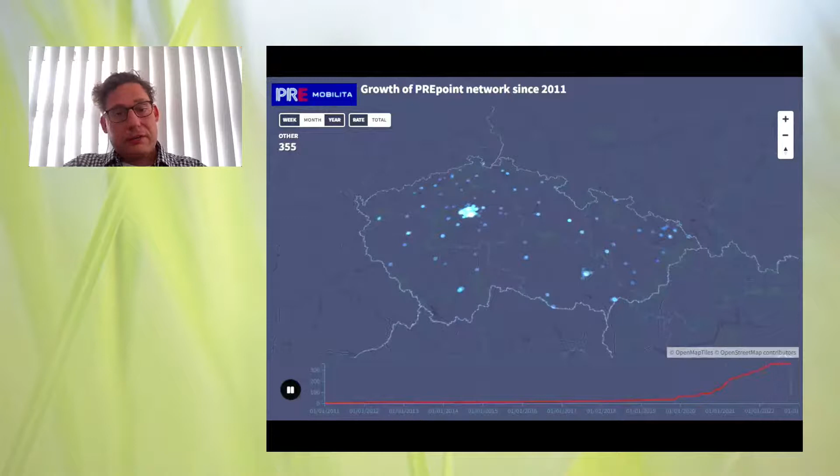From that, I wanted to show you how the project of public charging infrastructure went over time. Repeating one piece of information from the start, PRE is the second largest public charging operator here in the Czech Republic, meaning we operate around 400 public chargers. When you compare it to Western European countries, it's quite impossible to be in the top 3 with this size of network, but that's the current status of the network.

There is a plan behind it, and we are planning to grow the development plan. You can see on the chart on the slide that we are doubling the size of public charging infrastructure per year. So from that, we can see that starting in Prague, where most electric vehicles are operated, but by the time the network is growing, it's starting to become easy to drive through the Czech Republic.

What we can say openly is that the future is electric, therefore the charging map should be even more dense than it's now visible.

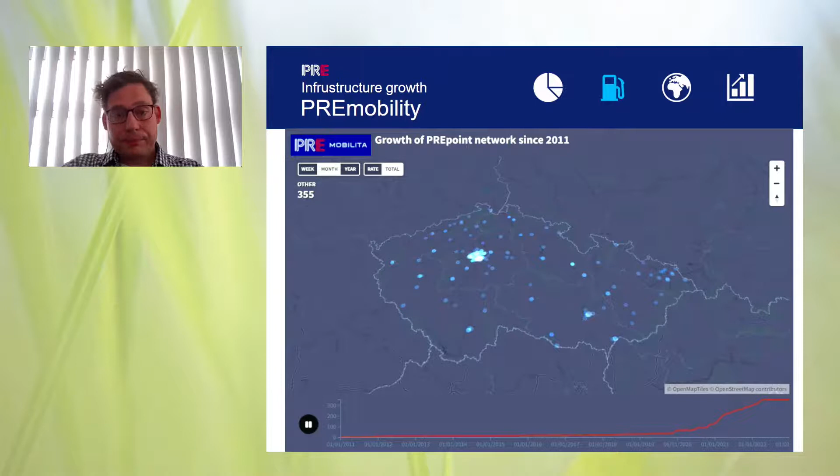Even in the year 2020, when there was a lockdown, we had quite a significant number. One third of our visitors on public charging infrastructure were from abroad, mainly Germany those days.

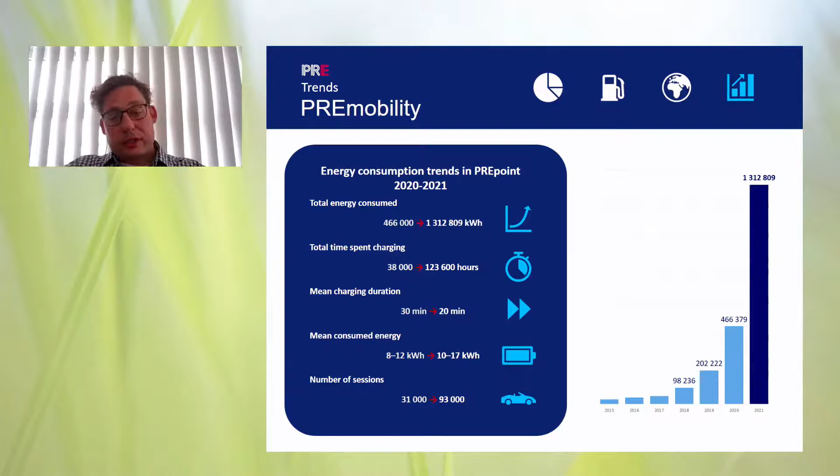So what are the key challenges we're going through in line with the strategic segments we are orienting or focusing on? Here in Prague, we are coping with the issue of having huge numbers of electric vehicles in one place, with the very same demand to be charged on time and drive wherever I like. That's why we really have to redesign the approach towards the grid and towards in-house buildings of charging infrastructure. That's really our key strategic initiative, to serve customers who have high numbers of cars in one building.

Plus, we have to accordingly shape the structure of public charging infrastructure in the city. For example, when you compare our initiatives focused on slow charging in the city, no one else on the market is doing so. It's a fact, we know it, but we are preparing the city of Prague to be ready for e-mobility.

We know that it's not normal to have a dedicated parking lot for your car once you're living in a city. That's why we're building such a huge AC, or slow charging, project in the region of Prague. What's the other challenge? As I was already mentioning, customers are used to spending less time on charging infrastructure, and they have larger batteries in their cars, so we have to prepare projects that really reflect this demand.

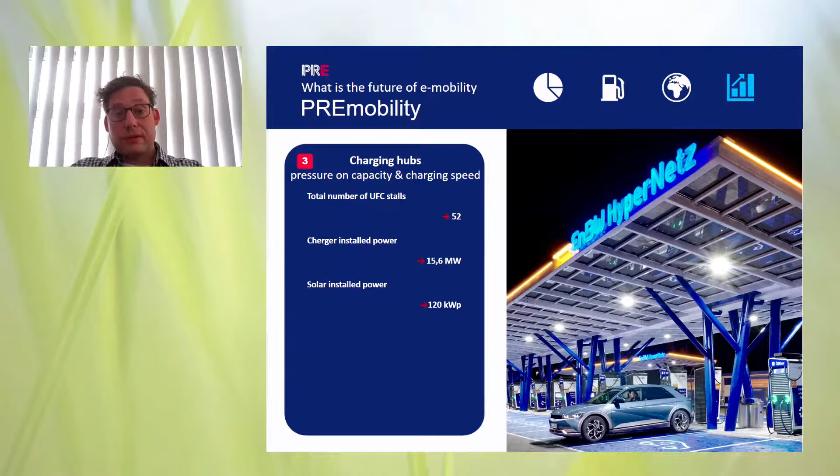And the last but not least, a special new topic for us as an infrastructure partner, especially regarding the issue of the Ukraine conflict: all the segments of e-mobility were accelerated, and there was one segment which was just in the field of visions and dreams, and it was heavy duty vehicles. But since like 3 months ago, it's starting to be reality.

What's the trouble in this case, or what's the challenge maybe? It's that the public charging infrastructure was designed long ago for standard family cars, and now we are having customers with a battery size like 3 personal cars, needing double the size of a parking lot. So that's the challenge which we are now trying to somehow solve and adjust our charging project for.

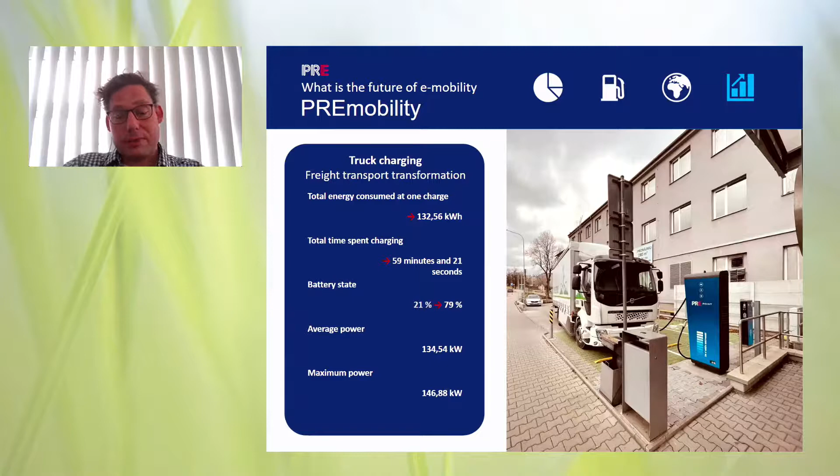And as the opener of this discussion, I think it's the general info what I wanted to share with you, and I'm happy to discuss the details and what are your experiences maybe from more developed markets than ours. So many thanks for your attention.

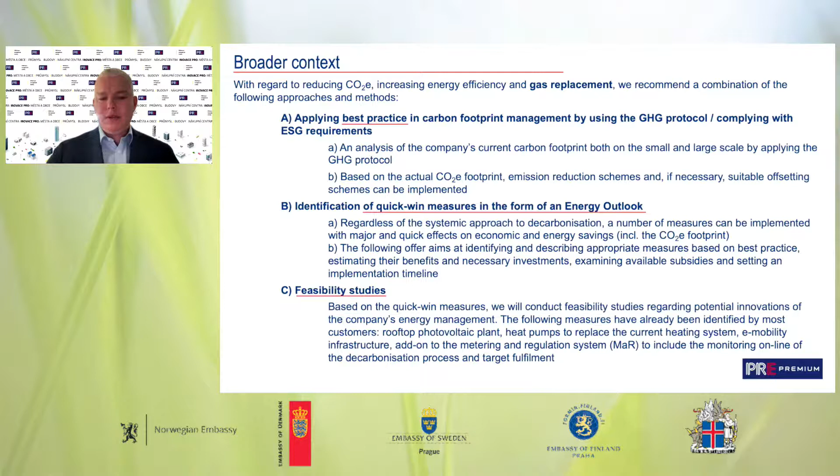After we've prepared this study, analysis and study of Energy Outlook, we usually continue with a feasibility study, where we go deeper into the technical aspects and prepare a regular technical solution proposal for how to go and get targets which are accepted from the Energy Outlook.

Reduction of CO2 footprint through innovation of energy infrastructure - gas replacement can increase your competitiveness, reduce or really exclude CO2 emissions to zero, and increase your energy efficiency. You can use these new technologies for a long period of time, so the technologies are already on the market. There are no technical questions or pilot projects needed. The technologies are here, and it's just necessary to choose the right one and implement them.

You can manage energy consumption online via the umbrella software. We call it Premium Digital. Via this software, you can easily meet ISO 50001 standards online. You can also, and we see this trend in the last period of time, produce your own energy via photovoltaic power plants. This is the most common way now of own energy production. And also you can additionally increase your EBITDA through energy efficiency.

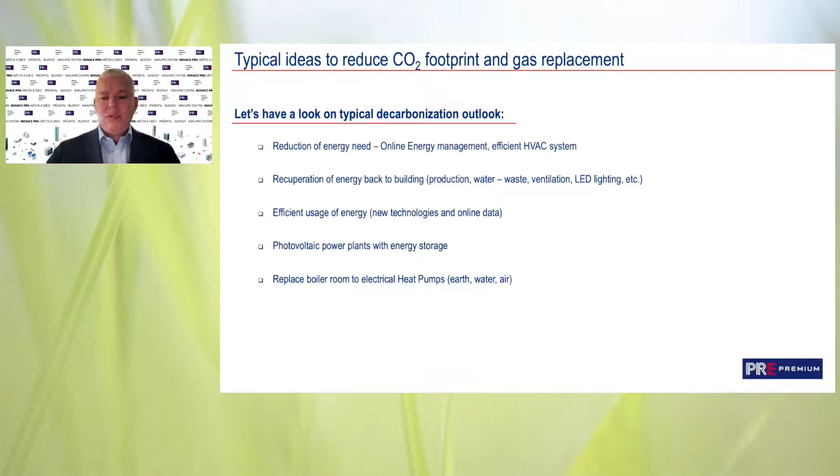This is the main topic now, connected with gas, to replace gas heat boilers with heat pumps, which are running on electricity, and also can be connected to the air systems. There are three possibilities how to use them. We can go in detail through questions in each project.

When there is an interest from the customer to make an analysis, we go through in the first step, as I said before, the Energy Outlook. The report is done usually up to 12 weeks. The price is in thousands of euros, not a high investment. We need a lot of information from the customer side, and we come with a description of the solution, budget, timeline, payback, and in some cases we try to find two different solutions, and the whole proposal is made via this Outlook.

Then we also look at financing, whether we go through our financing or financing with the bank, and also subsidies. So we are trying to find with the customer the best way to finance the project. And then we continue with a feasibility study or design work, and then comes the realization.

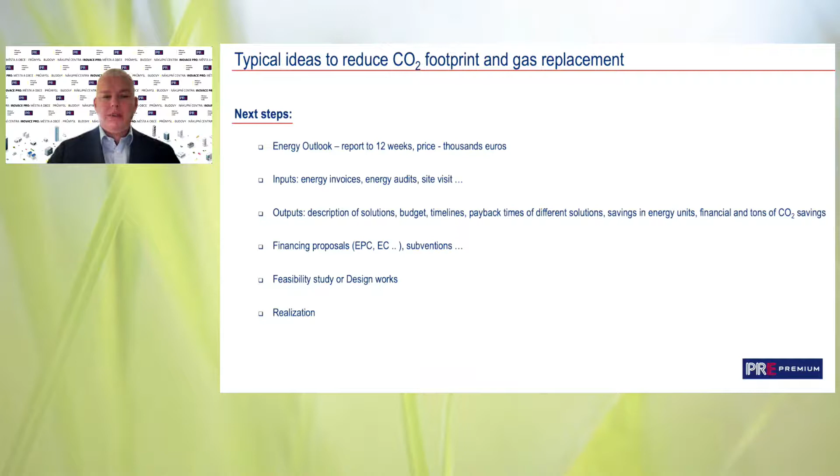Here is more detail about the Energy Outlook. You can see all the information we need to prepare the analysis. Mainly, we need an energy audit, project documentation of the actual state, a list of planned investments, and preferences from the customer side. Also, as much information as possible about electricity and gas consumption, including load profiles, especially in view of, let's say, 5 years production. And we discuss with the customer what his requirements are regarding compliance with ESG.

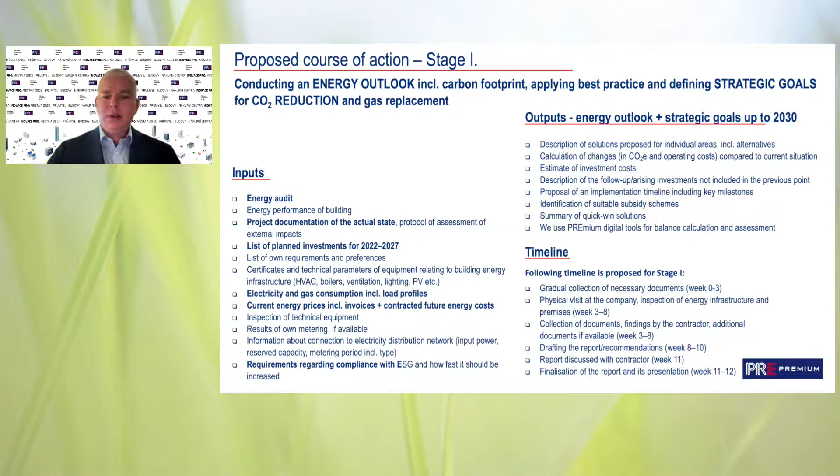Then we prepare through the Energy Outlook strategic goals in energy infrastructure, usually up to 2030, with a description of the solution in individual areas, including alternatives where possible. We calculate CO2, and as I said in previous slides, we estimate the investment cost and operating costs, and also the summary of quick win solutions through the GHG protocol. We use a Premium Digital tool not only for the analysis, but also for running the whole project up to 2030 and after that.

Here in detail is the timeline of how we go through each phase of the analysis. In general, we collect data, then it's necessary to make a physical visit from our technicians. Then we find the right solution, and we prepare the report for the customer. We discuss everything during the analysis, and we present the final report.

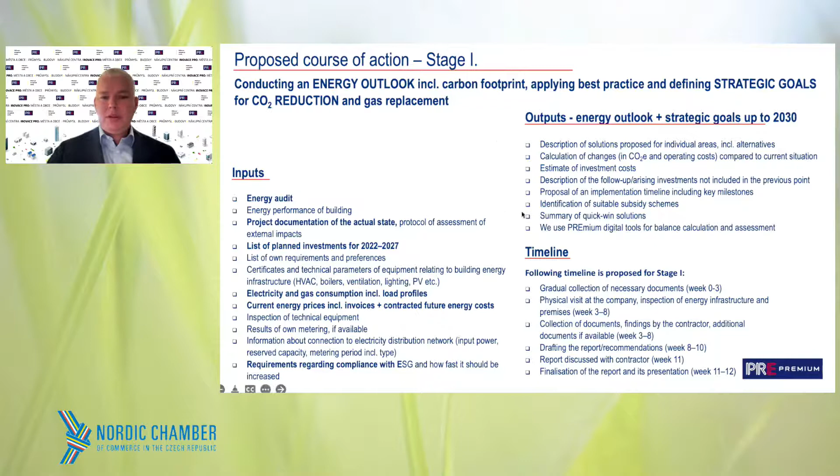Thank you, Mr. Stehlik. We have about the last 1 or 2 minutes because we are running out of time, so please take that into consideration.

Thank you very much, this is my last slide. After the Energy Outlook, we go to the feasibility study and drawing work, and here you can see details of how we go through the process. So thank you. And thank you again for the invitation, I'm here ready for any questions.

Great, thank you very much. Sorry for interrupting you, but I was afraid we were running out of time. We need to stick to our plan because we have a number of speakers here today.

I would like to ask you, how long does it take to build a photovoltaic power plant or replace gas boilers with heat pumps? Yes, with the power plant it is a little complicated because you need a construction permission, and before you get the construction permission, you need to make all the drawings and also a contract with the distribution network so the photovoltaic power plant will be connected once it's constructed. So this process needs at least 6 months.

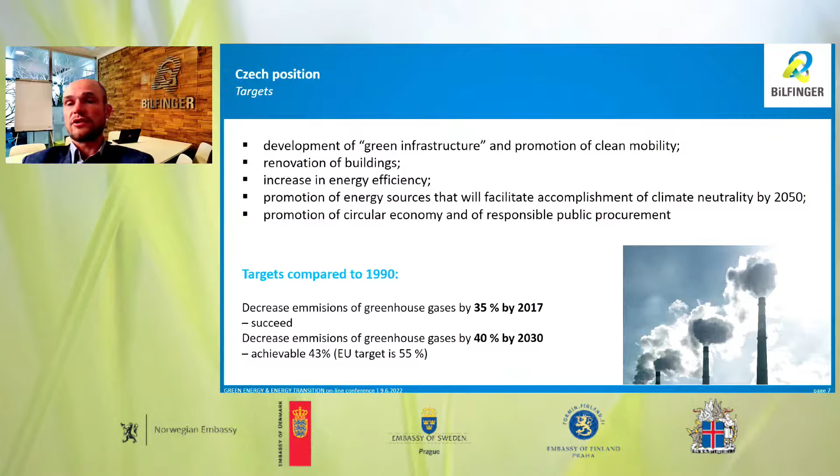There are several actions that the Czech government has in their strategy, which is actually to promote clean mobility and green infrastructure. Another big topic is renovation of buildings to make them more energy efficient, meaning residential, administrative, but also industrial buildings and industrial production sites, and to increase energy efficiency in the production processes. It's definitely a quite significant part of the puzzle.

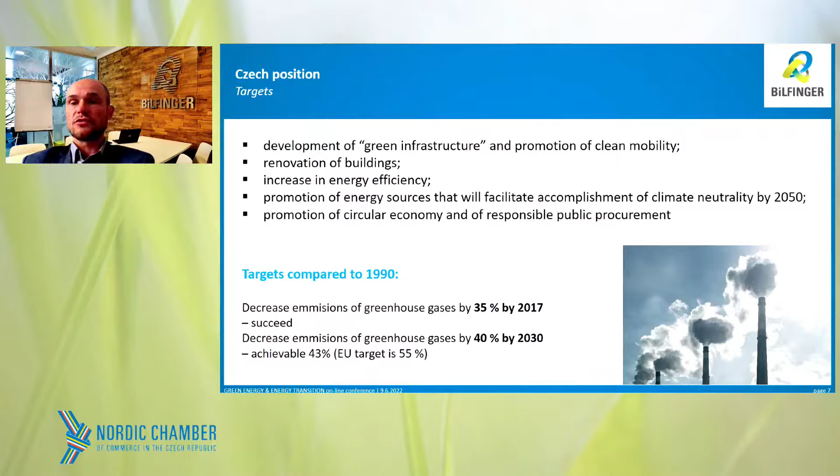And promotion of energy sources that will actually lead to climate neutrality by 2050, and also support the principle of circular economy and responsible public procurement.

From these you can see many trends that are on the market. Some of them are really closely connected with industry, some of them not, or only partly. What we see now on the market is that all operators of power and heating plants are now doing and preparing the greening of these power and heating plants, especially coal plants or plants that use coal or other fossil fuels for combustion.

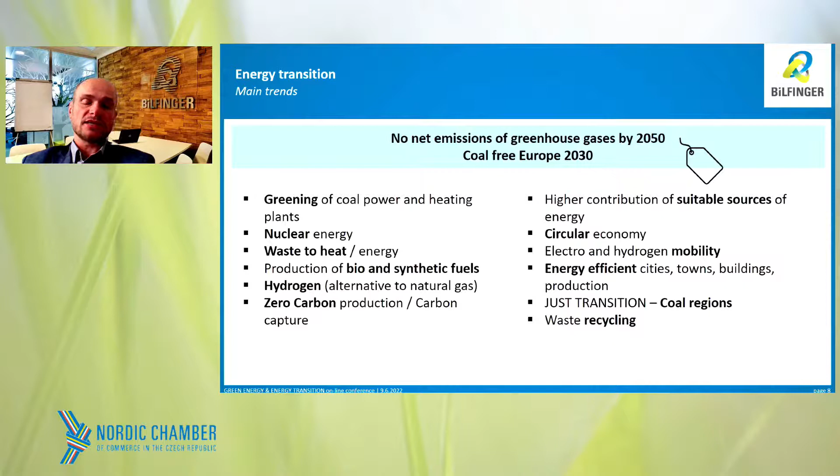We also see that one of the ways to reduce greenhouse gas emissions is nuclear energy. You maybe know that there were quite a lot of discussions about nuclear energy in the European Commission, also in the taxonomy and so on. Fortunately for the Czech Republic, nuclear energy is playing a significant role, especially for some countries including the Czech Republic, and thanks to France, which is also focusing on nuclear industry and planning new power plants.

Also Poland is planning new power plants, and you know that now we have opened the tender for Dukovany. So this is also quite an important game changer, and if everything goes well, by 2035 to 2038 we will have the energy from the fifth block of Dukovany.

A quite big topic is becoming waste to energy or waste to heat. It's definitely one way to deal with waste. Another trend is waste recycling and circular economy. But some of the waste is not possible to recycle, and there is the option to use the energetic value of the waste. There are a couple of projects planned on the Czech market for waste to energy, waste to heat. Unfortunately, not all of them are proceeding as we would expect, but definitely for the future this is the trend.

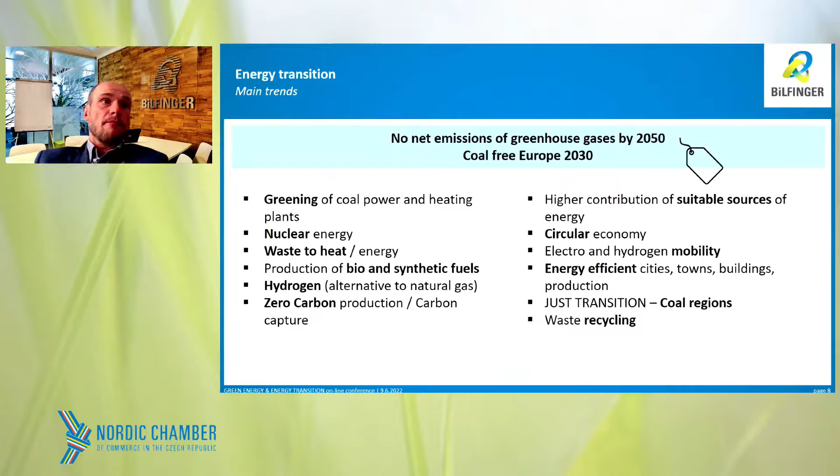Let's move to another slide, because I'll show you a couple of examples of investment projects that we see on the market.

On the other hand, there are industrial policies promoting the greening of industry, with short and long term goals.

There are several areas where definitely there will be investments, where companies and the public sector will invest.

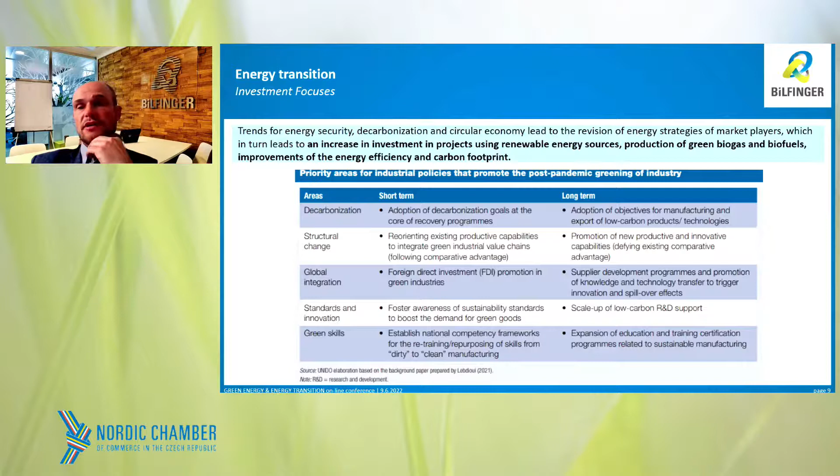Decarbonization itself - I've mentioned several examples, and I will touch on this topic later in detail.

Structural changes are also about orienting existing production capabilities to integrate green solutions and into the green value chain.

For global integration, it's about foreign direct investment and development programs to promote new technologies and technology transfers.

This supports R&D activities and other spillover effects.

A quite big topic is also standardization and innovation. Right now we are in a period where new standards are being created.

This applies to the entire value chain of production, to produce goods in a greener way, and also to promote the fact that these goods are greener.

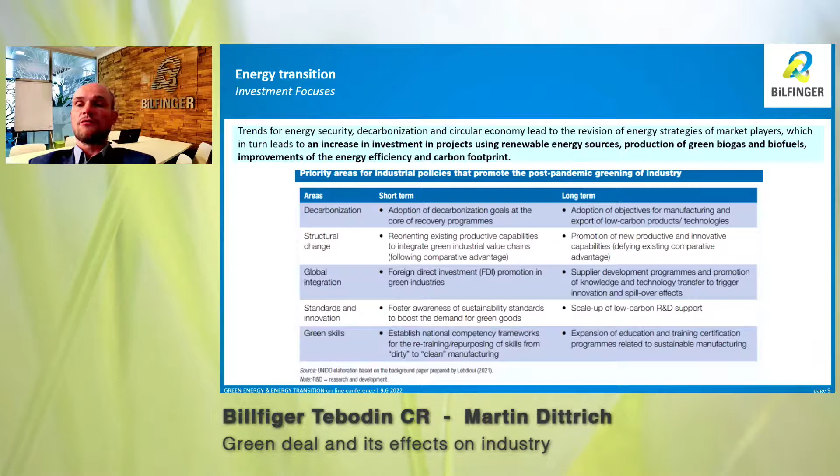That means training and certification for both the manufacturing and public sectors.

Okay, so these are actually the actions and topics that you can find in the Green Deal.

And then came February 2022.

The war in Ukraine started, and the EU responded to the situation and the energy issues we began facing with REPowerEU.

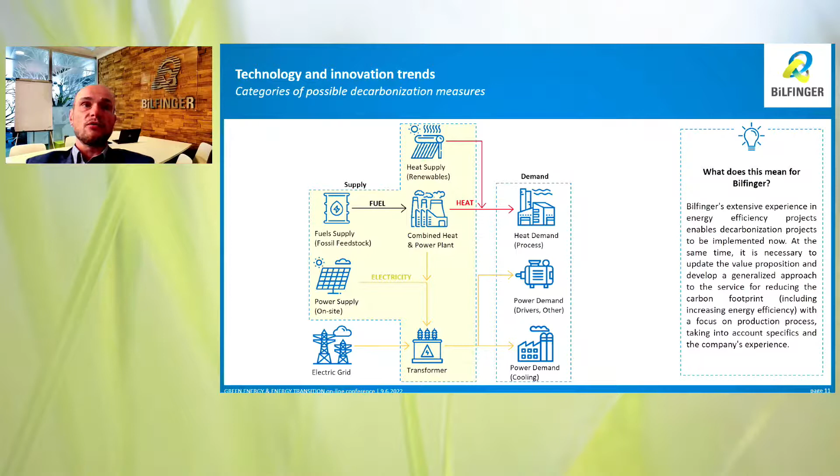They will also be required by the supply chain to prove their greenhouse gas footprint.

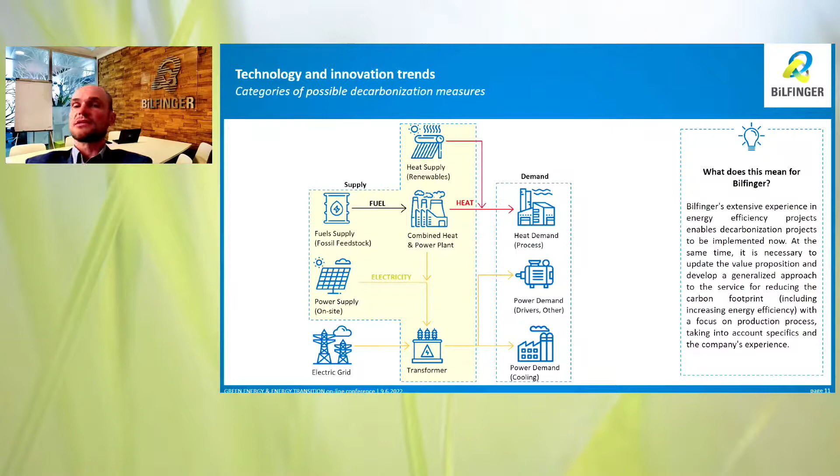There are several methodologies for calculating the greenhouse gas footprint. One of them is the Greenhouse Gas Protocol, where you assess the company in three stages.

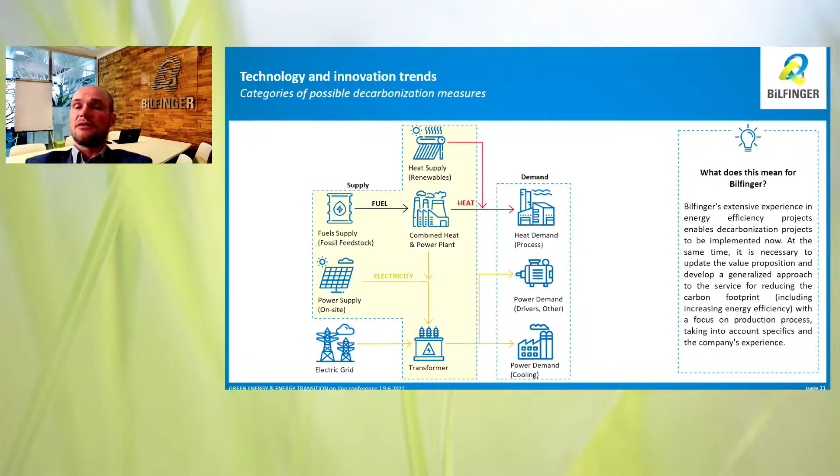What you see on this slide or picture is actually stage 1 and stage 2.

Stage 1 means all the greenhouse gas emissions that the production company produces during the production process, directly connected to its activities.

Stage 2 is the electricity that the investor is buying from the market, for which he also needs to calculate the greenhouse gas footprint of this energy.

There are several ways to reduce this greenhouse gas or carbon footprint. We can look at sources of heat, sources of electricity, and install new renewable energy sources.

This includes using solar, wind energy, energy from green hydrogen, and so on.

But there is also a big part of the story on the demand side, where we can optimize many processes in production, especially connected to heat demand in the production process.

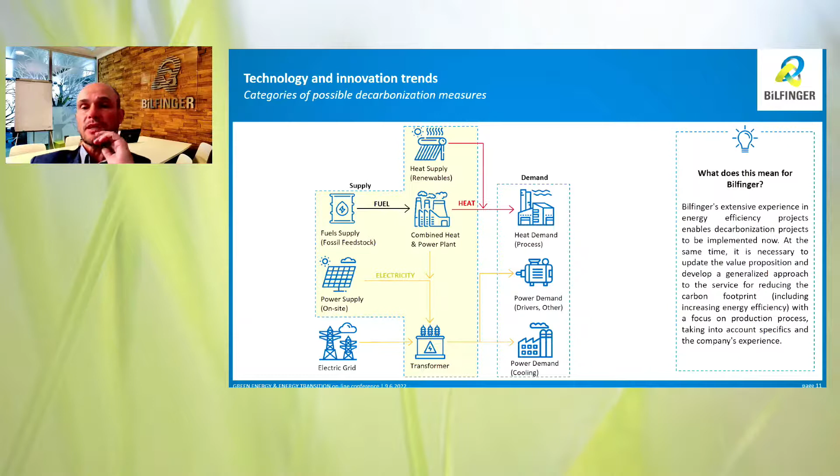It also involves using, for example, waste heat or waste cooling systems, to optimize and make the processes much more efficient.

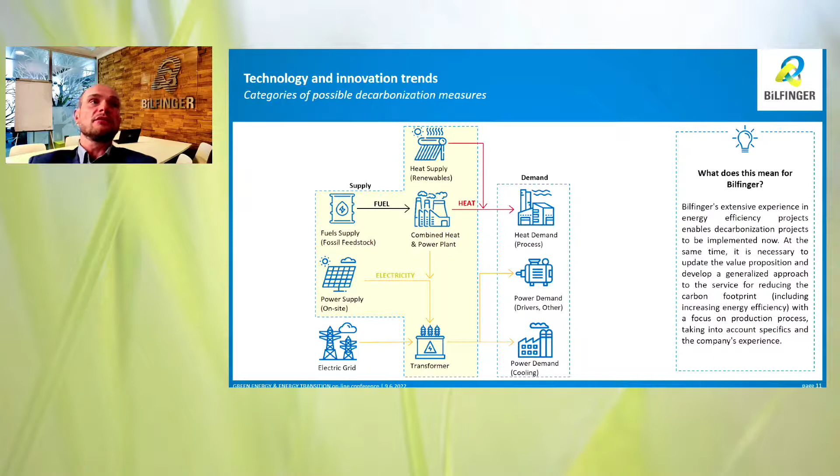Bilfinger is now building a portfolio of services for how we can help clients target these aims.

There are several fields where we can help industrial clients meet these targets and prepare the road towards carbon neutrality.

Most of these things I've already mentioned, but I would point out CO2 master planning, where we can really help clients analyze all of these processes.

We help clients create a road towards carbon neutrality.

We are also really focusing on new technologies and solutions like carbon capture, utilization, and storage technologies - I think this is one of the biggest trends for the future.

It's hydrogen - both green, but we still have other colors of hydrogen as well.

We can help the client across the entire value chain of hydrogen - not only production, but also transportation and utilization of hydrogen.

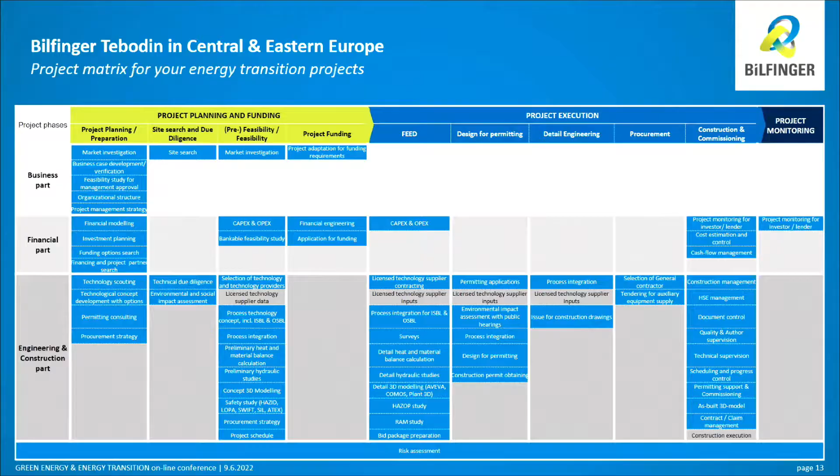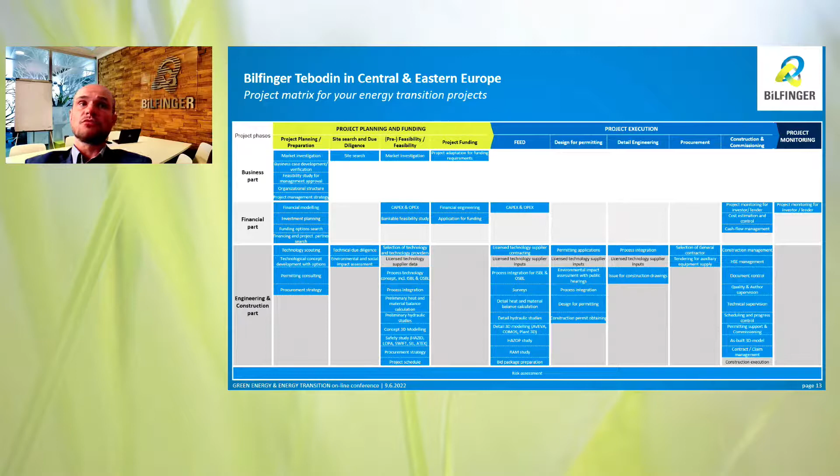Actually, I'm going to my last slide, where I would like to show you how we can help make these energy projects happen. As I mentioned, Bilfinger Tebodin is an engineering and consultancy company. Typically we are an EPCM contractor, meaning we help our clients through all phases of engineering, procurement, finding the right contractors, suppliers, licensors, and during execution we help manage the construction site, cost control, health and safety coordination, and these types of services.

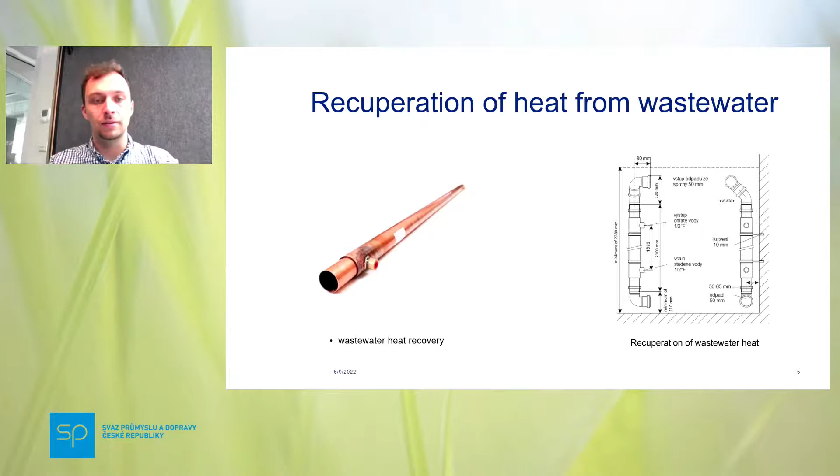In our residential projects, we also use a gray water system that saves potable water because it reuses the water twice in the building. That means the water used in sinks and showers is cleaned and can also be used to flush toilets. This also renews the energy before putting it out of the building. But that's a different subject for presentation.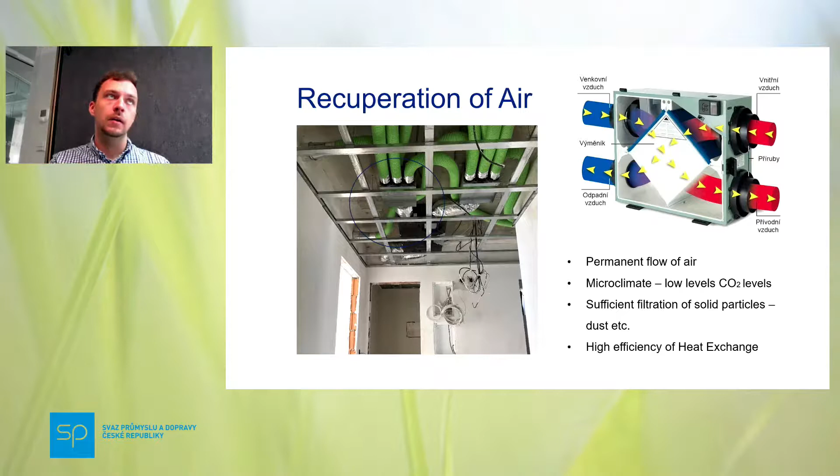That means you have lower CO2 levels and don't have to open the windows as often. Also, the efficiency of heat exchange is very high. So these are the solutions that basically renew energy and are very efficient in exchanging energy within your building.

But how can you produce energy inside the building without relying on an outside system, meaning burning gas or anything non-renewable? Basically, solar panels that can preheat water for heating the inner rooms and all the flats. So what is the system basically? The logic is that cold water is pumped up to the roof, where it circulates through the solar panels and is preheated to, let's say, 40 to 50 degrees Celsius. Then it's brought back down to where the gas burner is and heated to the temperature that's needed by the consumer.

From the energy certificate we created for this project in 2021, it was put into the occupancy permit. It's called Čertův vršek, and the installation of this energy efficiency system covers a third of the whole energy demand of the building. So that's a significant piece that can help throughout the whole project.

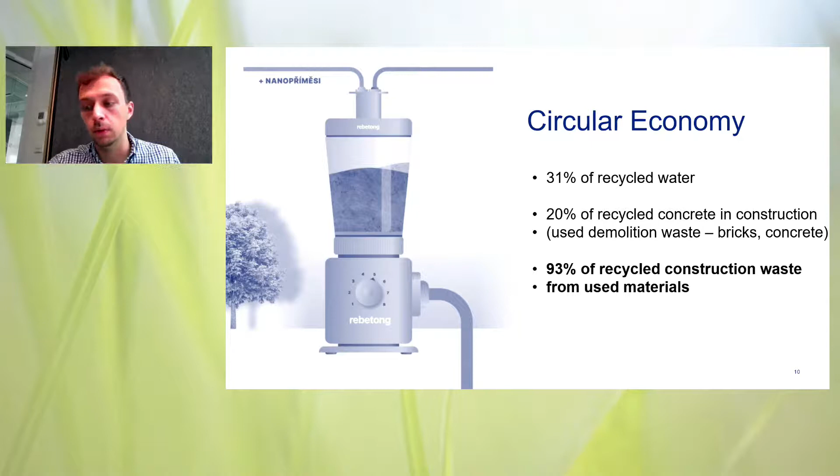Also, all the material not used during the construction process is being recycled. We have different containers for at least 10 different materials, such as plastic, glass, insulation, plasterboard, wood, steel, and I could count up to 10.

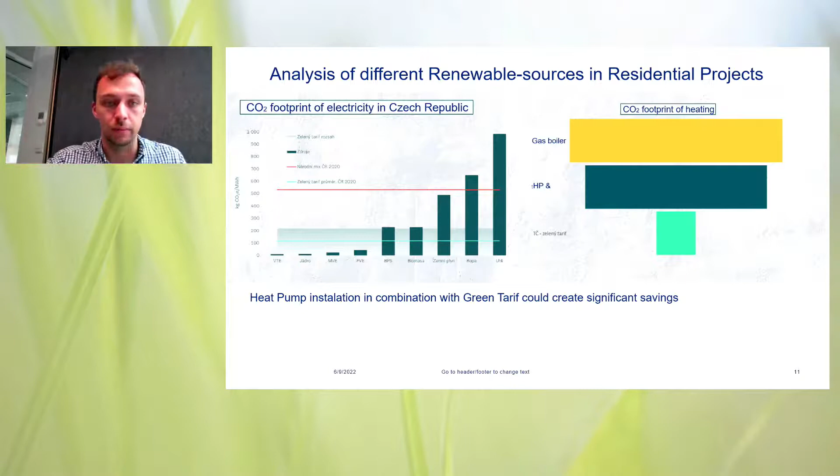What we're also trying to develop, since we're a development company, is to find new sources of energy and electricity in our projects. The CO2 footprint of electricity in Czech Republic is bad, so that's why we try to install renewable sources instead of gas boilers. I want to jump into the CO2 footprint as far as I can, since time is running out.

I want to mention that we are already doing something to follow EU legislation. In Port Karolína C, we offered green energy and electricity to all our clients, pre-provided for them. By now, two or three years later, 66% of all flat owners remain with the green tariff we offer them. This one was done with this provider; in different projects we use different providers.

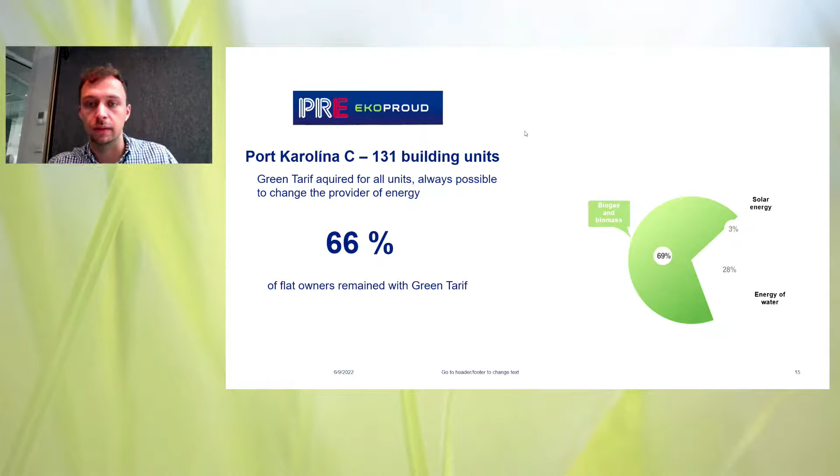We also support electromobility. That means that in most of our new projects, we have fast chargers, and also in the basement we have the EV charger that you can buy as a new owner with the flat.

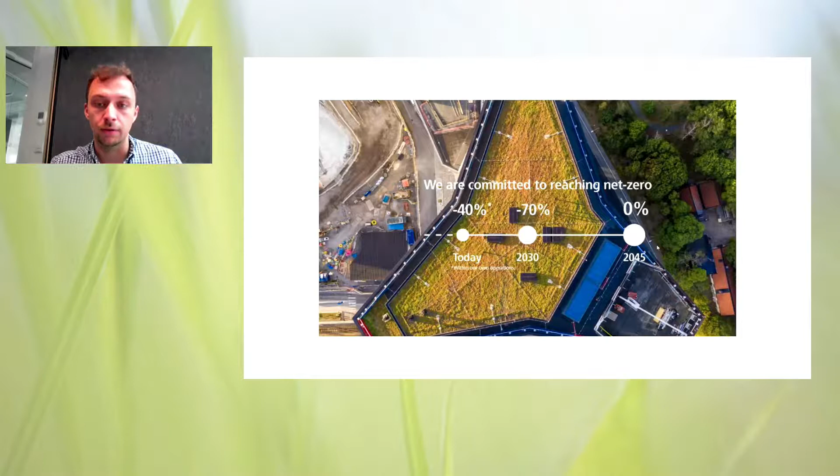As fast as I can, with the Skanska climate goal, we are in line with the climate goal of the EU and the whole protocol. That means that by 2045 we want to reach net zero. We started in 2015 with scope 1 and 2, and by that, within our own emissions, we've already reduced it by 40%, and by 2030 we want to be 70% down.

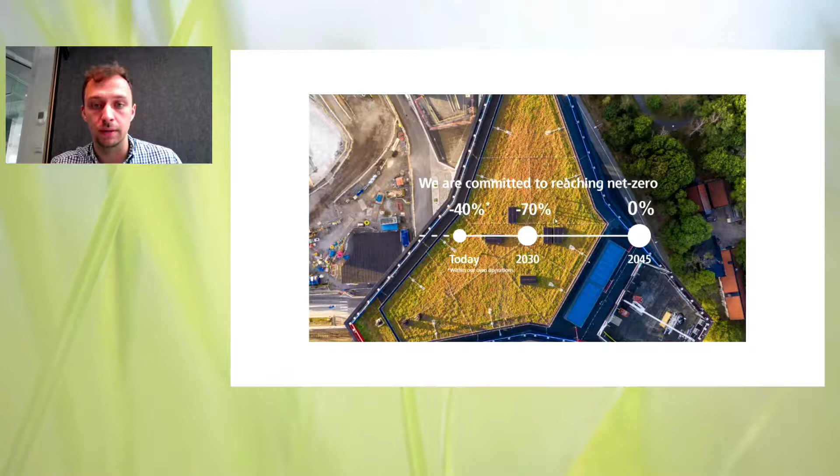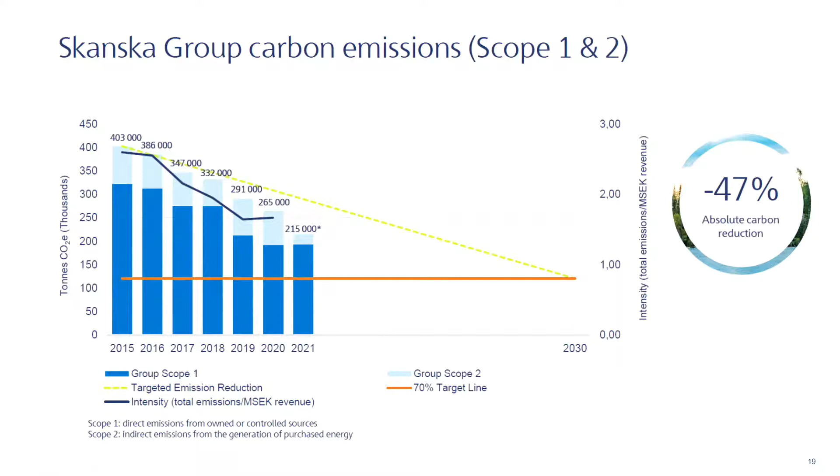This is how we are dropping the values. It's really nicely going, but that's scope 1 and 2. That means these are the direct emissions that we emit. It's not the scope 3, but that's the CO2 of how to accomplish it.

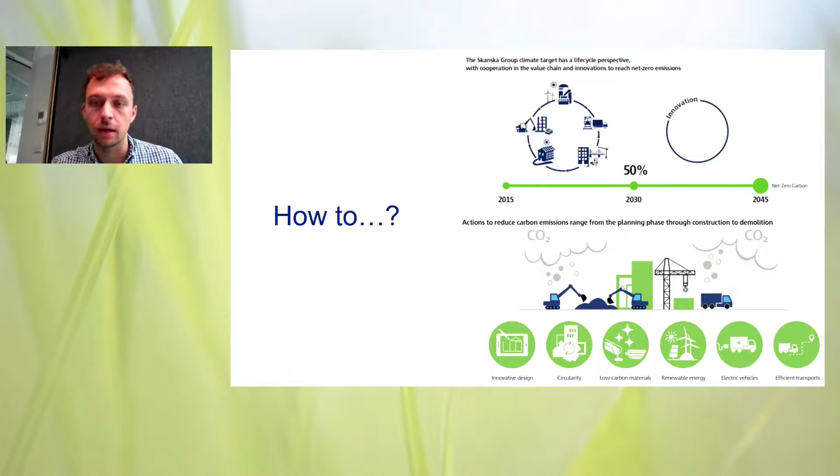Basically it's circularity, low carbon materials such as low carbon concrete, renewable sources, vehicles that are powered by electricity, and so on.

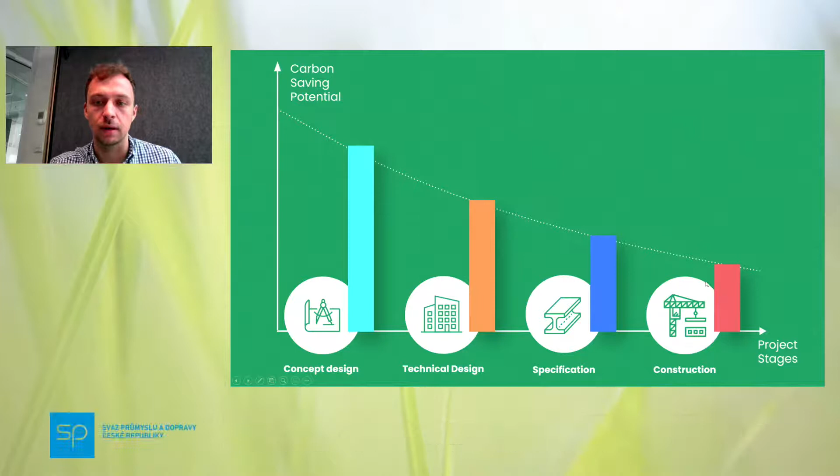And in scope 3, it's basically all about the concept design. As early as you can build or design a building that is going to save carbon emissions, the better, because in the construction process it is hard to accomplish that when everything is already designed.

So this is how it should go on, the carbon model. The early stage of design is basically what matters, and a small detail in the end: we're already planning to build the first wooden structure that is going to be 6 stories high, and that already saves around 60 to 70% of CO2 emissions in embodied carbon.

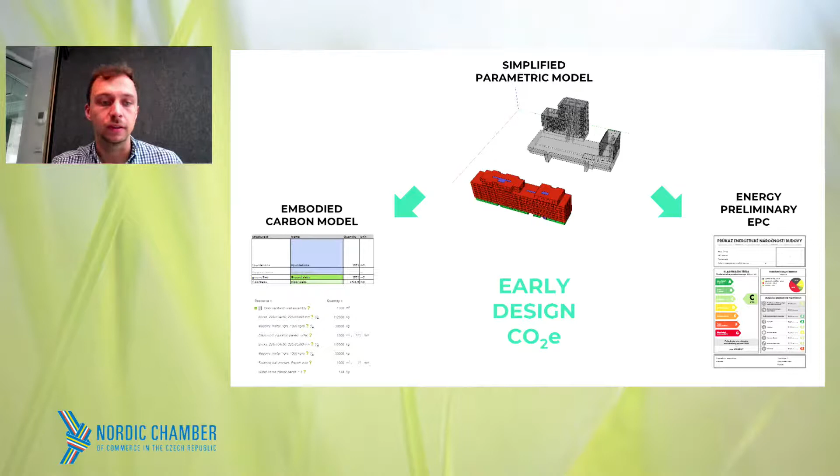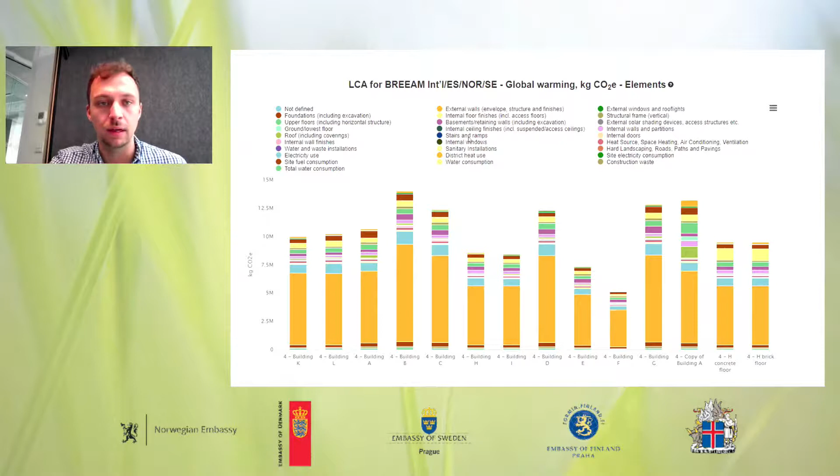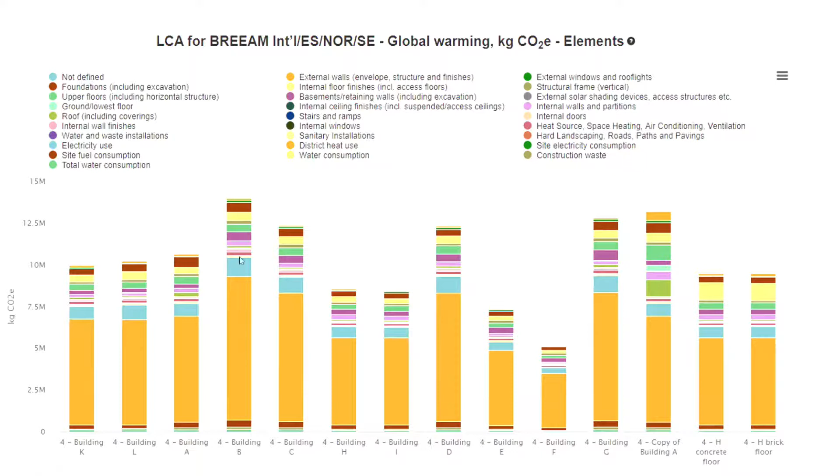That means when you're starting with materials and the district heat use, the 50 years of use of the building that needs energy is the biggest one. So the main message is that if you want to lower the emissions of a building throughout this whole life cycle, it's basically the energy that is powered into it that has the biggest CO2 footprint, not so much the materials.

This is only some of the CO2 solutions that we use, as I described: low emission concrete, renewable sources, recuperation of air, wooden structure, also gray water system.

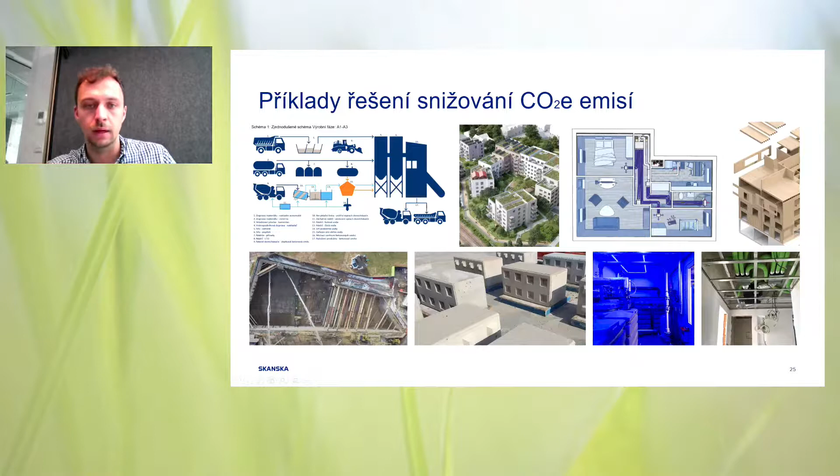And that is the final slide of my presentation. Hopefully you got the message, and thank you.

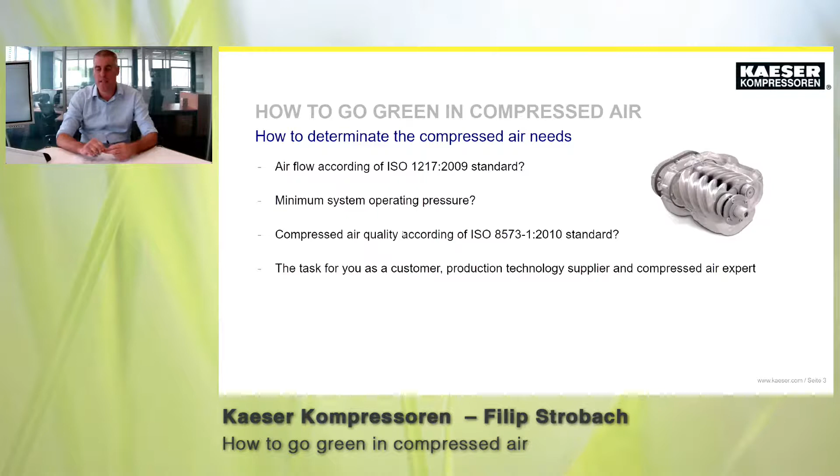I suggest performing a compressed air audit. Sure, you can try to calculate all production scenarios by hand, and the human brain is a very useful and powerful tool, but it cannot compare all possibilities. A proper compressed air audit will give you deep insight into your air production, specifying the minimum, average, and maximum airflow needed.

It also shows the fluctuation of the air during shifts. A good audit also describes the pressure drop between the compressor room and the point of use, and shows the air leakages of the system.

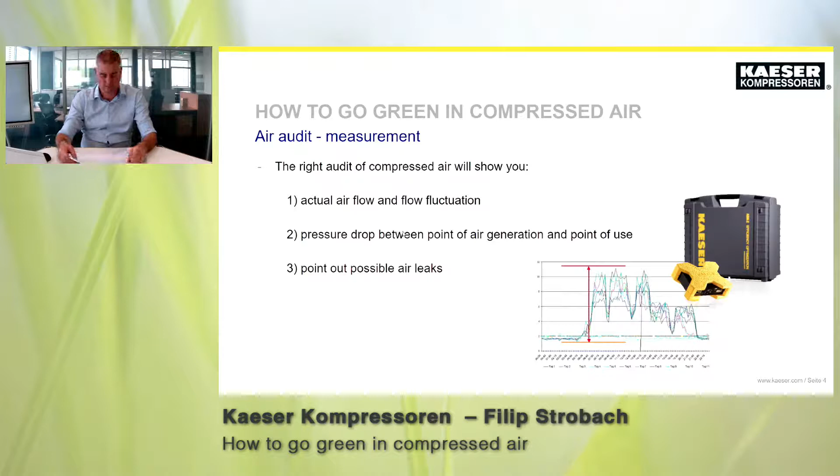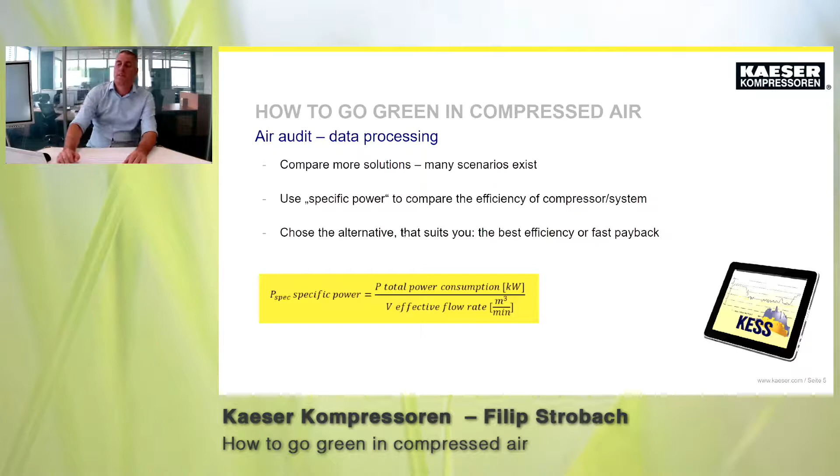After the measurement, the log data has to be evaluated and can be used for simulation of a new compressor room scenario, or for exchanging a single compressor or several compressors in your system. And there is no single right solution.

There are many solutions. You can work out tens or hundreds of solutions, and it's a good exercise to compare what is better or more efficient in terms of energy, and what is good for the safety of the production, and so on. The calculation programs that many producers use can compare many solutions and help you decide whether to use the most effective system or the system with the fastest payback.

For comparison of the efficiency of the system, use specific power according to ISO 1217 standard. We can simplify it that this value is the efficiency of the compressor or the compressed air system, and it allows you to compare different size compressors from different producers and different models. The formula is mentioned in the slide below the text, and it's quite easy: you have to divide the total power consumption of the compressor or system by the effective flow rate of the compressor or system at the same pressure. The figure you get specifies the efficiency.

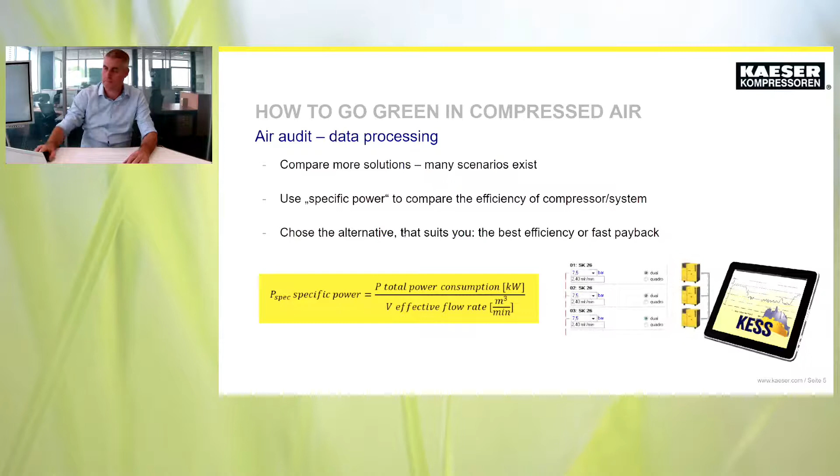Let me say also a few words about variable speed compressors. In Kaeser, we call it sigma frequency controlled compressors. There is a strong marketing message that variable speed driven compressors solve all your needs and save a minimum of 20, 30, or up to 50% of your energy cost. It's a very nice marketing argument, but variable speed compressors must be designed and used very carefully, because they are not always a solution for decreasing your energy bill. We have seen many systems where using variable speed compressors brought customers higher investment cost, higher service cost, and also higher electricity cost compared to a properly sized base load or load/unload compressor.

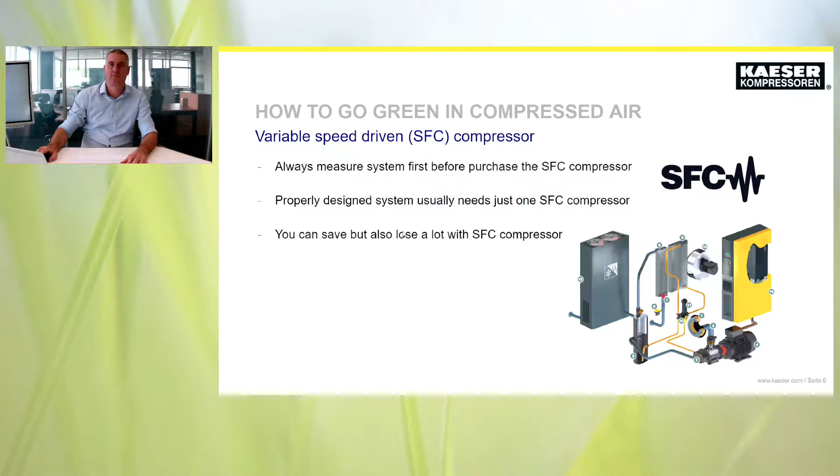For a larger air system, you definitely need a master controller. Implementing a clever master controller to manage your compressed air system brings you more benefit than just energy saving. It also optimizes service intervals, allows you to monitor and control the system remotely, and stores data including alarms and failures. It gives you the opportunity to export the data for your energy management system according to ISO 50001, into files you can work with later on, like Excel files and others.

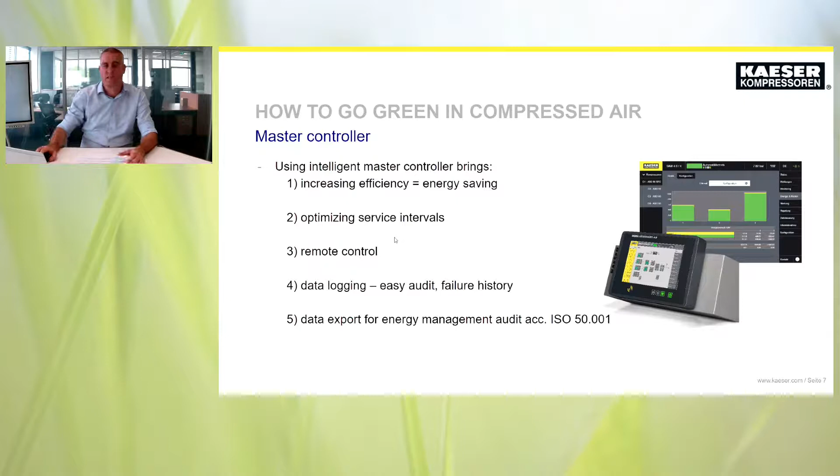Another valuable feature of the screw compressor, or rotary compressors generally, is heat recovery. It is free energy that you can gather from your compressed air system. You can recover, based on the type of compressor, up to 96% of electric power for air or water heating, sanitary water heating or preheating, or process water preheating.

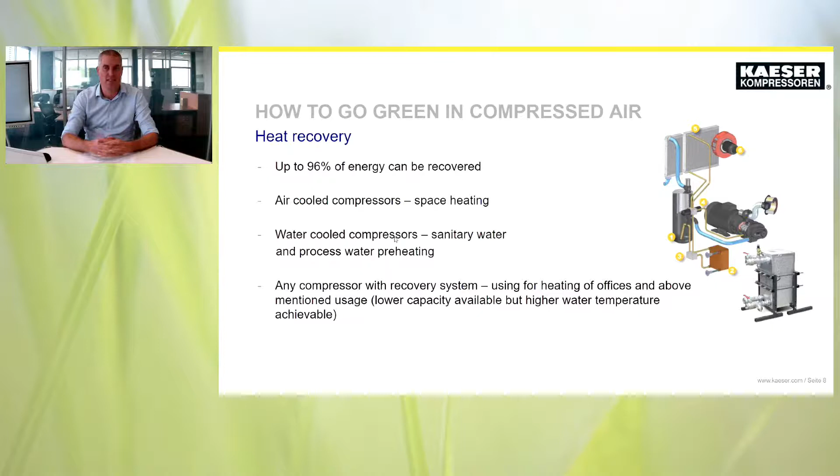Nowadays, when power and gas are extremely expensive, heat recovery has a very fast payback. We receive significantly more inquiries for compressors equipped with heat recovery systems, and many companies that in the past refused our offer for heat recovery now come back with requests for retrofitting existing compressors and existing systems with these exchangers.

If we move from the compressor to the pipeline system, we can also find a lot of possible savings. Reducing the required system pressure and pressure drop of the air treatment equipment always reduces power consumption. The rule of thumb says that approximately 1 bar lower operating pressure of the system means approximately 6% of energy saving.

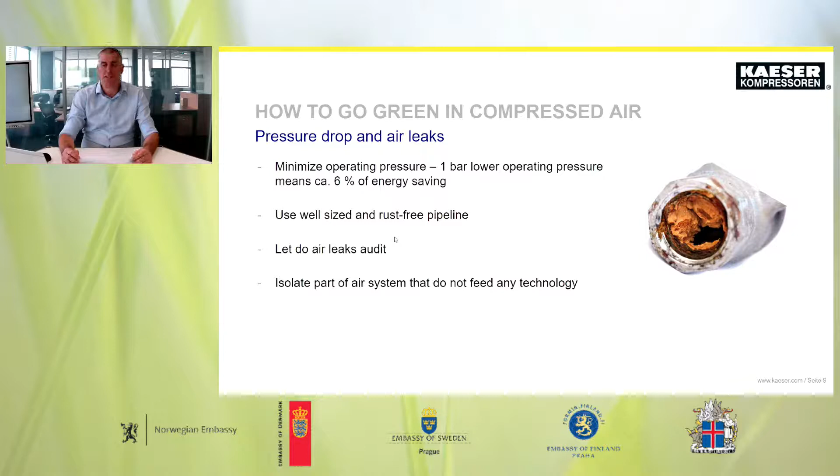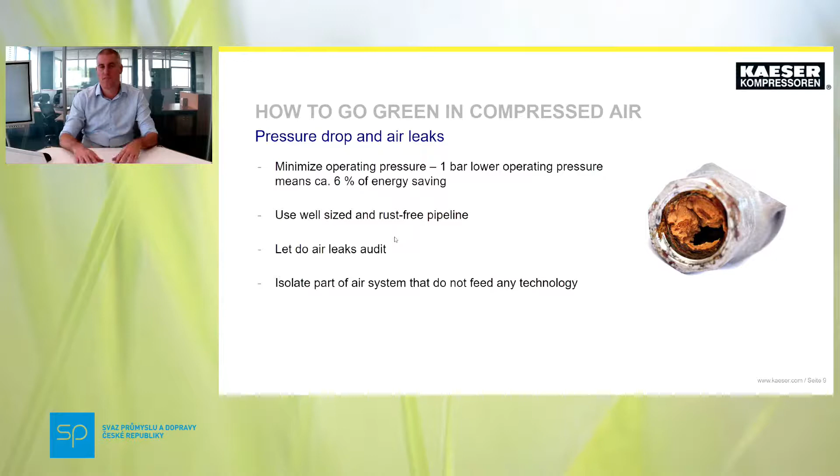I also recommend using high quality, rust-free pipeline, and maintaining connection hoses, quick couplers, and other components of your system properly to reduce air leaks and save your energy and service bill. Air leaks never sleep, so when the air leakage is caused by the technology itself, we strongly recommend installing shut-off valves upstream of the production lines and closing the valves when production stops. This can be done manually or automatically, and there are many options on the market.

Also, using efficient compressed air dryers, filters, and other components would save a lot of kilowatt hours and service cost too. I recommend choosing dryers with a dew point-dependent control system that reduces energy consumption when the system works in partial load.

Also, it's beneficial to use heat-regenerated adsorption dryers instead of heatless adsorption dryers for higher flow of compressed air, basically over 1,000 cubic meters per hour. But you can also find equipment with smaller capacity. So if you would like to be more efficient, you can also find heat-regenerated dryers for lower capacity than 1,000 cubic meters per hour. But sure, the equipment is more expensive—on the other hand, it saves energy.

Some refrigeration dryers dry the air to approximately class 4, which means +3 degrees Celsius, and use refrigeration gases for their operation. We produce and deliver, and I recommend using only dryers with the newest refrigeration gases that have a low impact on global warming potential.

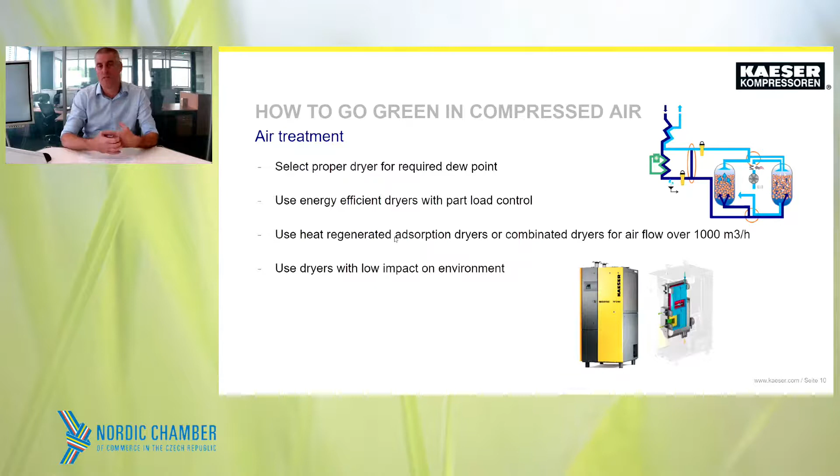So to sum up and simplify the above slides, I strongly suggest making the research, because comparing the specific power allows you to choose the efficient compressor. Then measure, because measurement allows you to design an efficient system and find potential savings. If you have more than 2 compressors, it's good to use a master controller, because it increases the efficiency of the compressor system, and not only that.

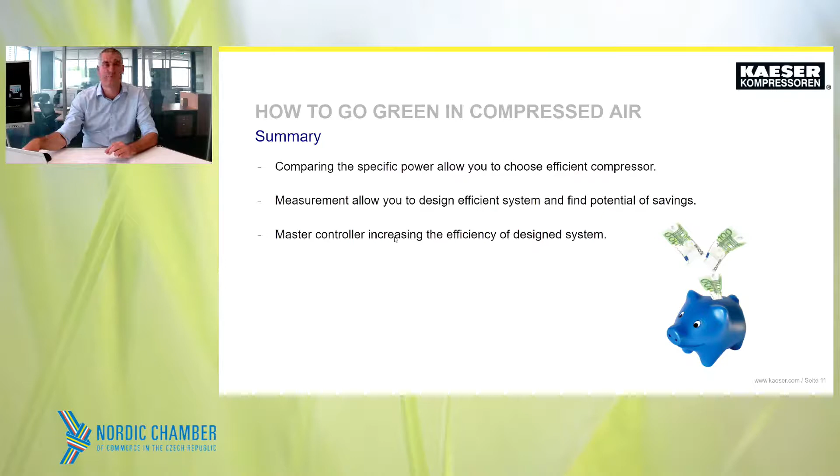Heat recovery, as was mentioned, brings you a huge amount of free energy. Care about the pipeline, because by reducing the required system pressure, pressure drop and air leaks, we are saving unnecessary usage of air and power. And finally, with the right treatment, you will save energy and environment.

So, to the real end, all the above basic steps for compressed air system design bring you the complete potential of energy and money saving, heat and gas saving, and CO2 reduction. And this is our contribution to the green policy. As I mentioned in the beginning of my presentation, go green means go smart.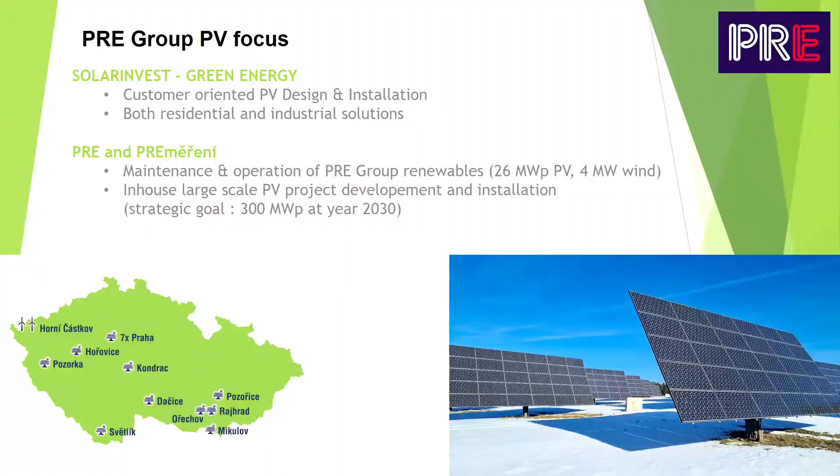Within the PRE Group, which was partly described by Mr. Stehlík, Solar Invest, let's say the daughter company, focuses on photovoltaic design and installation for both residential and industrial customers. Our mother company focuses on maintenance and operation of our renewables. We operate almost 30 megawatts of renewable power, mostly photovoltaics.

And we prepare as well new large-scale photovoltaic projects. One of the strategic goals of our company is to have 10 times the power of renewables by 2030, to help lower carbon emissions as well.

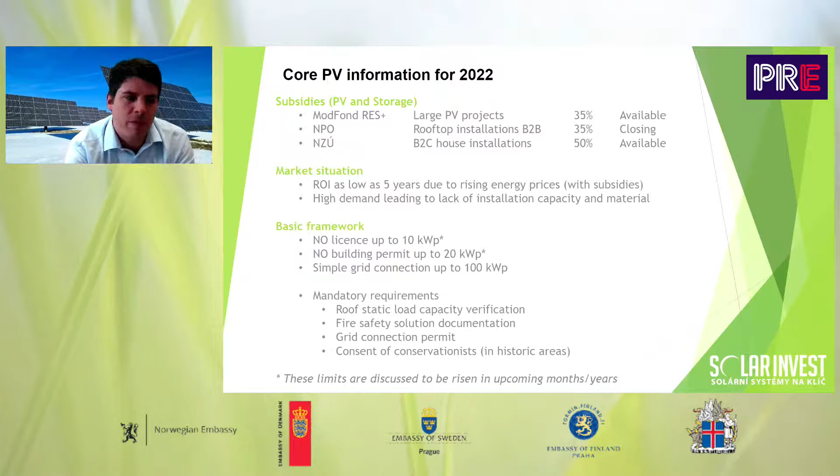Let's start right ahead with the core information that you need to know about photovoltaics in Czech Republic in 2022. There are 3 subsidy programs available at the moment.

The first one is ModFond, Modernizační Fond, which is suitable for large photovoltaic projects, the field installations. The subsidy starts at 35% of investment, and can be lower for bigger projects, because the bigger projects are compared to each other and only the more efficient are subsidized.

The second program is Národní plán obnovy, NPO, suitable for rooftop installations for industrial customers. It is also 35% subsidy, and the initial call will be closing in August. So most projects that will get the subsidy must already be under preparation to be able to ask for this one. We hope that another round or call will be signed by the ministry in upcoming months.

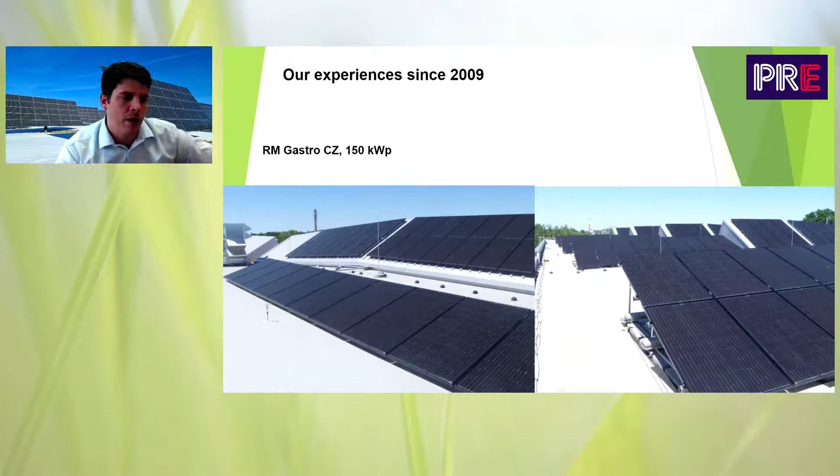When all these things come together, the photovoltaics can be installed. I will show you some recent installations for, I would say, typical industrial customers. This is gastro industry - they need a lot of cooling, so photovoltaic, which provides energy during summer, is one of the best solutions they can have.

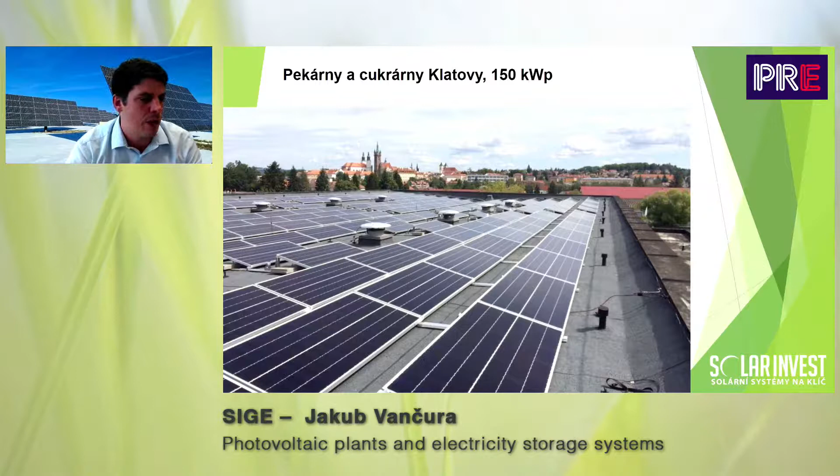This is installation for a bakery, 150 kilowatt, which we've done 2 years ago. Very common customer or very common industry for photovoltaics are shopping malls.

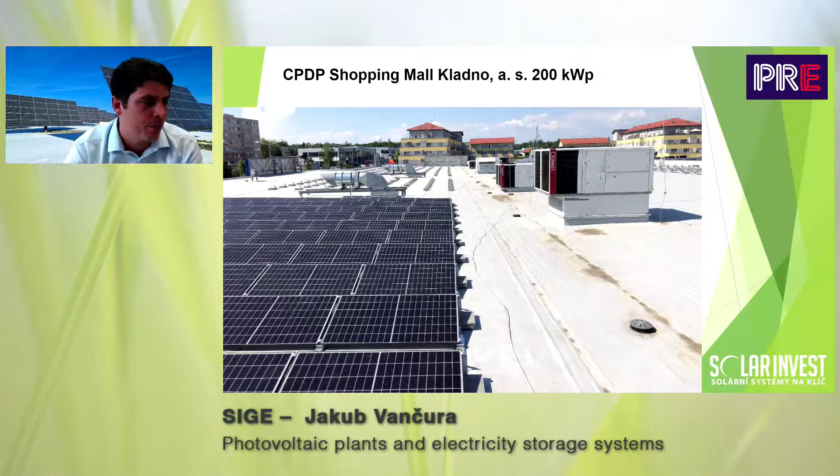They usually have large areas on roofs which can be used. This photo is during construction - you can see it partly done and part being prepared for panel installation.

And logistics buildings, logistic areas - they have large roofs as well, and they are mostly usable for photovoltaics.

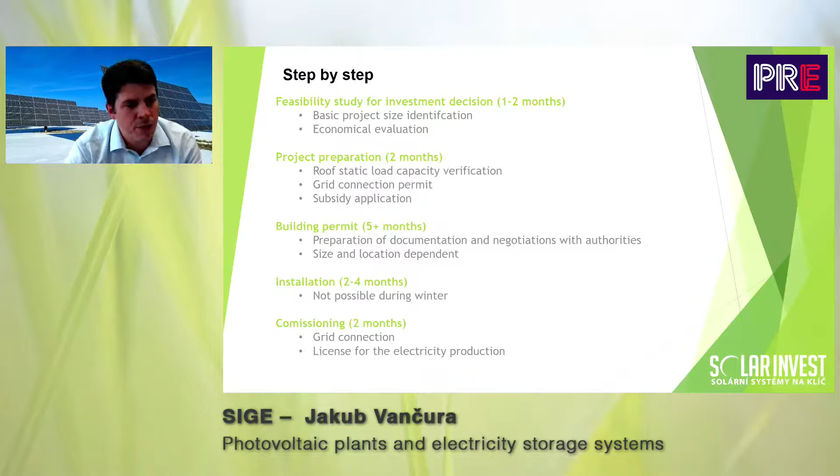What do you need to get done before having a photovoltaics? I'll try to describe a few step-by-step points. Usually, the first step is a feasibility study for investment decision. You will get information about the ideal size of the photovoltaics, which depends not only on the area that you have on your roof available, but your consumption should be taken into consideration as well.

Because if you have too much production, then the efficiency is lower because the energy goes into the grid. You get some payments if you sell the electricity, but it's not as effective as if you use it on your own. So the feasibility study will give you the information for your decision, whether photovoltaics and what size is best for you.

Then some project preparation is needed. You have to verify the static load capacity of the roof. You need to ask for a grid connection, whether the photovoltaics will be connected to the grid. So far, there are no restrictions on that, but they can occur in future - it's been a problem in a few areas in the past as well.